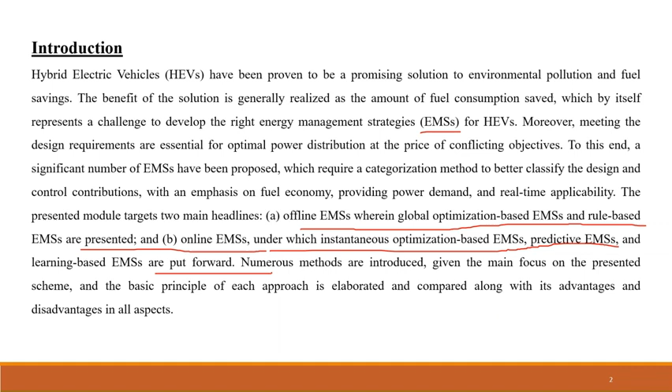Numerous methods are introduced with the main focus on the presented scheme, and the basic principle of each approach will be elaborated, and we will also know the different advantages and disadvantages. Now, energy management aims to obtain an optimal power split in view of complex driving conditions. It is commonly acknowledged that there is an improvement in the fuel economy.

The complex configuration and behavior of the multi-source hybrid energy system introduces challenges to the performance of the energy management system. Regardless of the topology of the powertrain, the EMS aim is to instantaneously manage the power flows from the energy converter to obtain the control objective. The control objective will be reducing the emission, reducing the fuel consumption, and improving the overall efficiency of the vehicle.

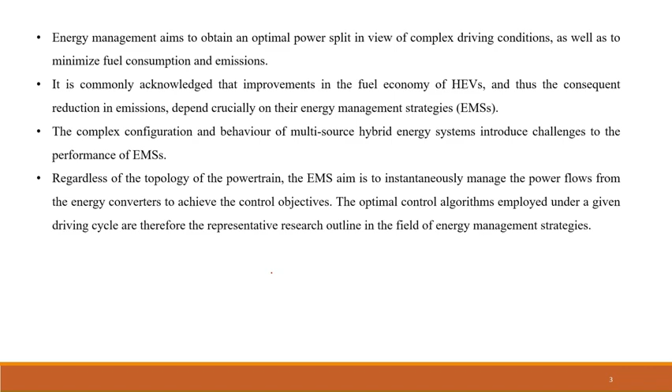Contrary to pure electric and fuel vehicles, HEVs have various power sources, and therefore it complicates the structural layout. And HEVs have demonstrated a significant improvement in vehicle fuel economy and emission reduction while meeting the power requirements. As the technologies have gradually advanced, we categorize the energy management strategies into three main parts: rule based, optimization based, and learning based. Let us now classify them in the following figure.

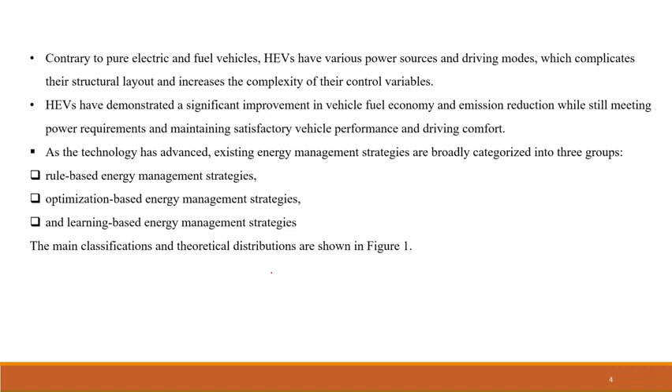With increasing environmental problems, rising greenhouse gases and global warming, clean energy sources are needed, and that's why we are moving towards electric vehicles and hybrid electric vehicles. And to control the overall performance of the hybrid electric vehicles, we need the energy management strategies. So, EMS is an essential challenge in HEV's design procedure to deal with the power distribution in multiple power source systems for the improvement of the performance of the HEVs.

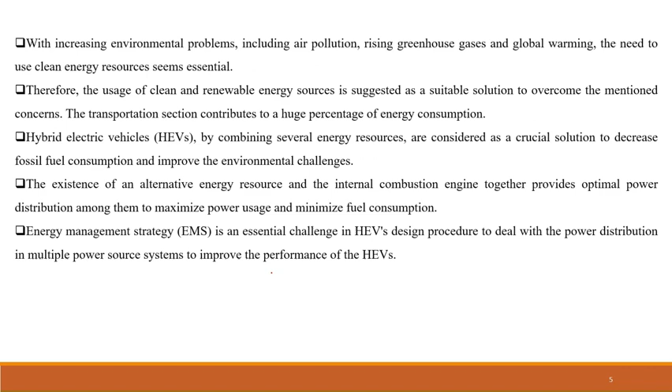Now, the major task of EMS is what? It is controlling and organizing the power flows, energy storage, and power generation between the subsystems in order to save as much energy as possible. And the final goal of the EMS is to attain lower emissions and fuel consumption so that all the energy needs are met.

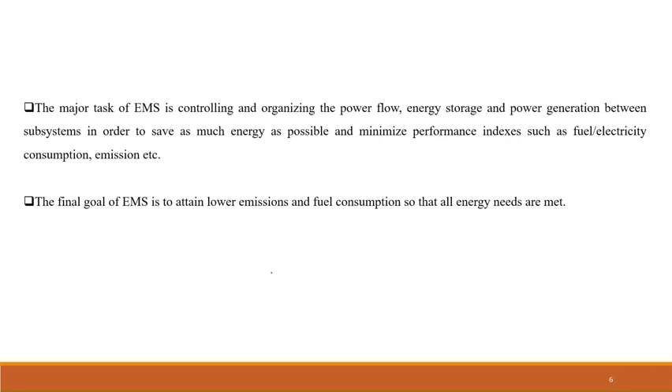Now, this is the basic classification. We have the rule based strategies and the optimization based strategies. Under rule based strategies, we have definitive rules and fuzzy rules. Under definitive rules, we have state machine method, power following method, and thermostat control method. And under fuzzy rules, we have conventional fuzzy, adaptive fuzzy, and predictive fuzzy.

Under the optimization based category, we have instantaneous optimization, under which we have model predictive control, Pontryagin's minimum principle, and equivalent consumption minimization strategy. And under global optimization, we have game theory, linear optimization, dynamic programming, genetic algorithm, and particle swarm optimization. And the learning based energy management strategies have the concepts of deep learning, supervised learning, and reinforcement learning. So this is how we basically categorize them.

And these rule-based energy management strategies are static in nature, while optimization-based and learning-based strategies are basically dynamic in nature. So this is the overview of how the energy management strategies are categorized.

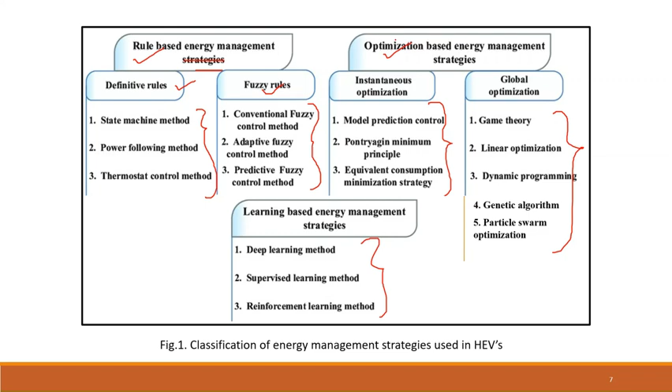Now coming to the deterministic rule-based strategies. In this method, the control rules are performed by using certain if-then rules or lookup tables. A set of logical criteria is specified to share the power between the motor and the engine by taking into account the performance of the engine and the motor, as well as determining the static value of the threshold. This method does not rely on any mathematical model, and it is quite simple, which leads to simplicity in implementation and reliability.

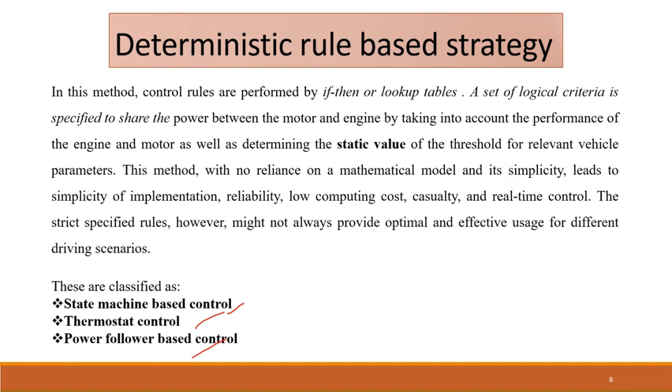And therefore we started with the rule-based energy management strategies in the initial stage, and these are classified as state machine based control, thermostat control, and power follower control. Now, what is thermostat control? The fundamental principle of the thermostat control strategy takes into account a few input variables. The input variables will be vehicle velocity, the torque, the speed information, and the battery SOC.

The fundamental principle of the thermostat strategy is that whenever the battery SOC becomes lower than the predefined low threshold value, the engine starts to work and produces some fixed power at the lowest point of fuel usage. While a portion of the power is utilized to drive the vehicle, the other portion is employed for battery charging. When the battery SOC exceeds the high threshold value, the engine is switched off and the motor alone supplies the vehicle's necessary power.

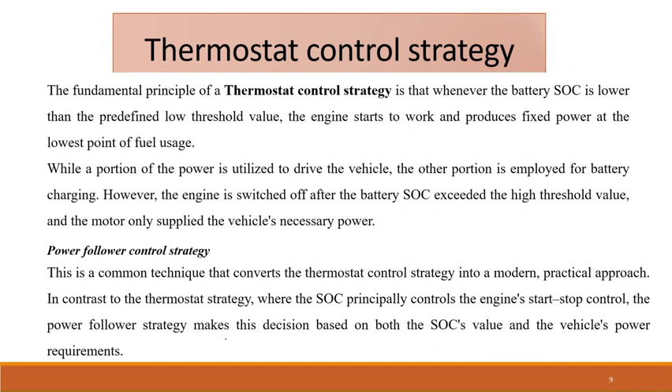And what does the power follower control strategy do? This is a common technique that converts the thermostat control strategy into a modern practical approach. The difference is that in the thermostat strategy, only the SOC was the input variable that controls the engine start and stop. The power follower strategy makes this decision based on both the SOC value and the vehicle's power requirement.

And the state machine based strategy was a state machine mathematical model developed and built by Banvait, implementing power distribution by executing certain predefined control rules. In this strategy, the maximum power was extracted through the electric motor to drive the vehicle, while the rest of the power is provided by the engine. Because in the hybrid electric vehicle, we know that there is a battery or other energy source, and there is the IC engine generator set. So this is what the deterministic rule-based strategies are concerned with.

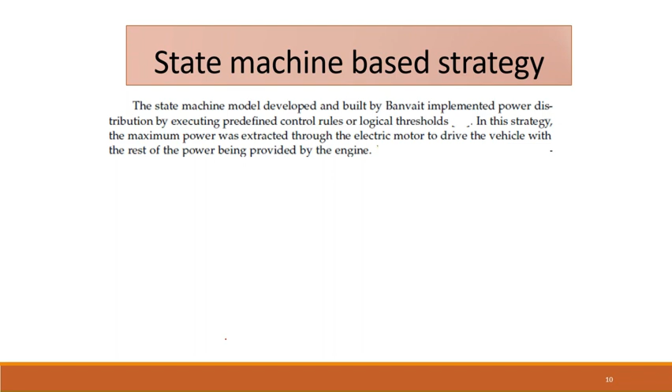And then we have the fuzzy logic based strategy. It is a fuzzy logic based non-linear control technique that helps reduce the difficulty of control problems in non-linear time-varying systems. The three steps of the fuzzy logic based strategy are fuzzification, inference, and defuzzification. The control input shifts from numerical values to linguistic fuzzy variables during the fuzzification phase. The power sharing ratio is then determined using a suitable membership function that is dependent on the input fuzzy variables. Robustness and adaptability against uncertainty, noise and disturbance are produced through the fuzzification process. And the defuzzification process converts the variables back to numerical form.

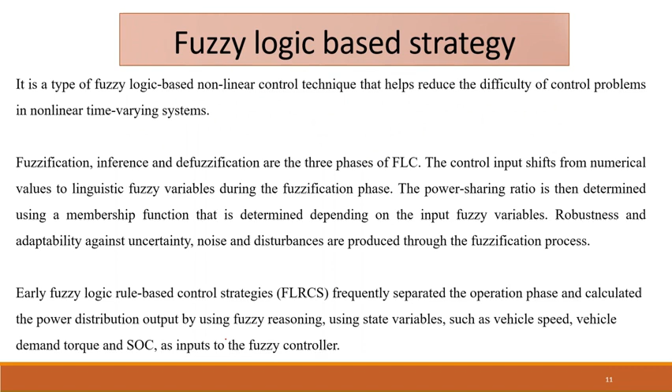So, early fuzzy logic based control strategies, abbreviated as FLRCS, frequently separated the operation phase and the calculation of the power distribution output by using fuzzy reasoning. And what are the input variables? The state variables are the vehicle speed, vehicle demand torque, and SOC. Certain modifications of the fuzzy logic based strategies are done by adaptive fuzzy and predictive fuzzy. These are modifications of the conventional fuzzy logic based control strategies. So this is how the rule-based control strategies are demonstrated for the vehicle's energy management.